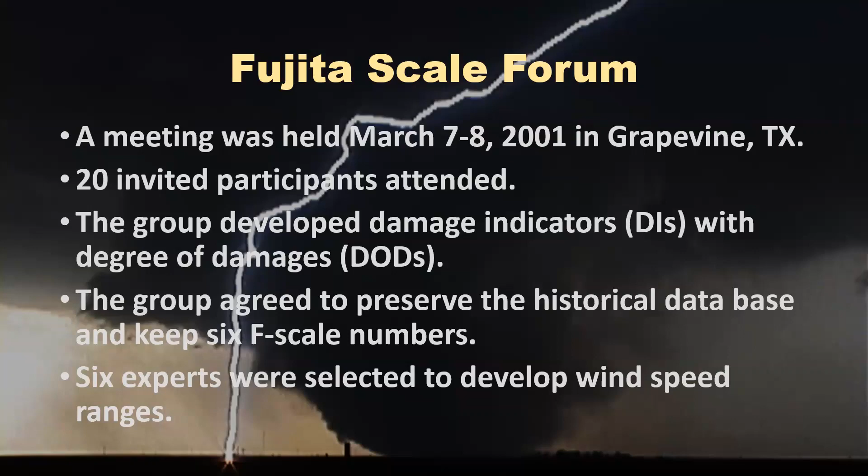So I think everybody's familiar with the EF scale. It has 28 damage indicators. In fact, we even have some trees on there. And this is still used today. But the updated version is going to go in here and really do a number on that. So in the new EF scale update, there's going to be 30 DIs. So there's going to be 2 more.

But within this table, there's going to be some combinations. We're going to combine them, and there's going to be some separations, and there's going to be some deletions of some of the DIs involved. Just to give you an idea, DI1 is small barns or farm outbuildings. That stays the same. DI2 is 1 or 2 family residences. That stays the same. And of course, residences are the vast majority of what we rate. However, number 3, the manufactured home single wide, is going to be combined together with the double wide.

And in place of 3, what we're going to have is the concrete masonry style homes that are typically in the southeast, like Florida. You don't see them as much around the Dallas-Fort Worth area, and you see them in the southwest as well. And then there's going to be a whole host of other changes that you'll see later on. Next slide.

So basically, each damage indicator has several degrees of damage, from 0 to total destruction, arranged in increasing order of severity. The DODs are a function of wind speed, so the failure wind speeds are a 3-second gust at 10 meters above the ground. Now, why that? It's because the standard anemometers in the country for most of our observations are 3-second gusts at 10 meters above the ground. 3 seconds is because of the response time of the anemometer. 10 meters is just the baseline out at airports and sites to record wind speeds.

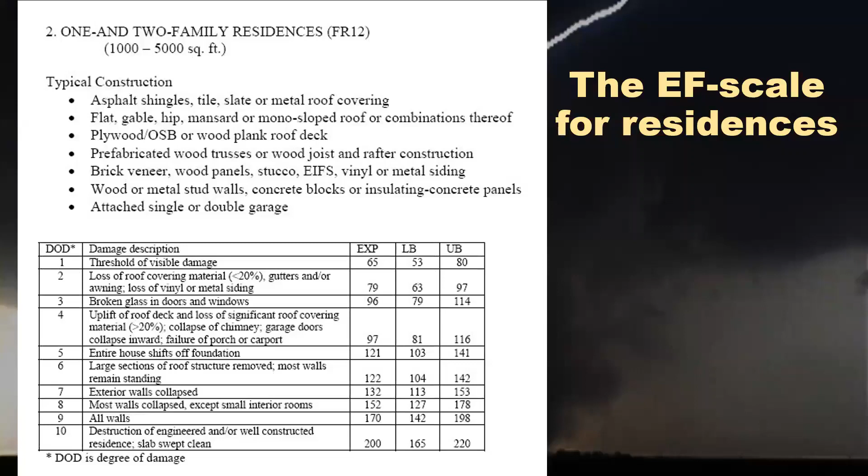Another problem is where the walls are attached to the foundation. Typically, you need to have every board as strong as each other in terms of where it's connected, but that isn't always the case. The weak link there is where the studs are attached to the bottom plates, and that's typically a straight nail connection. Works great for taking loads downward, but when it's reversed upward, doesn't do well at all. So that's why we have the ranges. Next slide.

So there's more description about the expected, upper bound and lower bound. So the key for the surveyor going out there is to recognize those critical anchors, braces, and connections that would have held the building together. So you have to know something about how buildings are supposed to be built in the first place. You have to know a little bit about the building code. It's typically a minimum for the center of the country, and a minimum would be a 90-mile-per-hour 3-second gust. That's typically what buildings are.

Now they call it a 115-mile-an-hour ultimate, which is not quite the same, but pretty close to the 90. It's just an averaging time difference. But that's what buildings are mostly constructed for, which doesn't sound like a lot when you think about it. 90 mile per hour, I mean, is that your goal? The odds of hitting that are pretty small. So we don't see buildings built very well to tornado winds. A 150-mile-an-hour tornado wind, even minus the debris, still wrecks most buildings. Next slide.

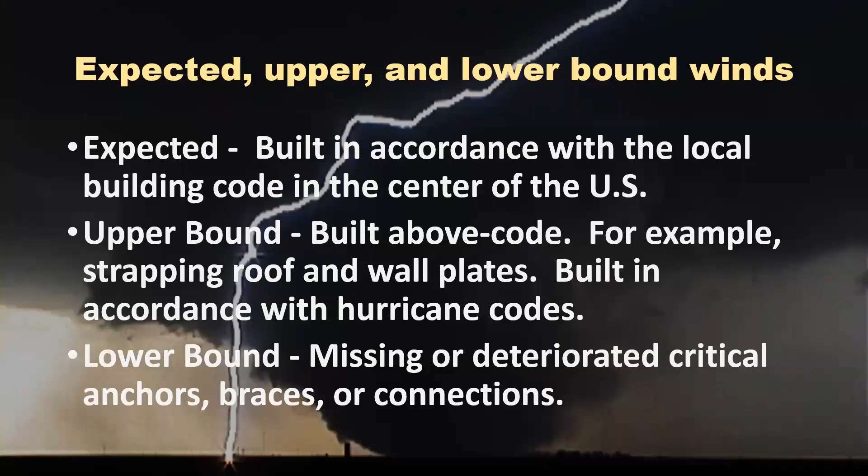So looking at the little differences here between the Fujita scale, converting to the 3-second gust, and then on to the EF scale. You see some differences there, especially as you go higher with the numbers, the 4s and 5s especially. It does not take a 300-mile-an-hour wind to destroy a house completely. And that is really one of the reasons why the engineers at Texas Tech, who I worked under, it's my alma mater, wanted to change this scale, because of overrating. And overrating a tornado's wind speeds makes for higher insurance rates and all that. If you could bring those down a little bit with some reason for doing it, then it's more closely aligned to what actually occurs. Next slide.

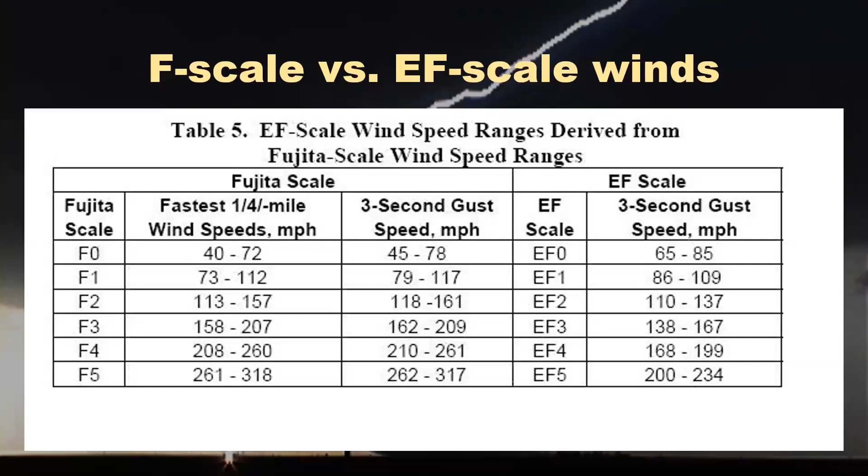So the EF scale still uses the concept of wind speed damage correlation. It's looking at the damage and then coming up with a relative wind speed to fail it, rather than just obtaining the winds from Mach 1 to Beaufort 12, which is what Fujita did to try to rationalize his F scale. His F scale was to fill the gap between those two scales, and he decided on 12 increments for some unknown reason, but that was how he could justify his scale. By the way, it was in 1971 when he developed his F scale, and it didn't become popular until the next decade, and it wasn't actually in peer-reviewed science literature until 1981.

So it took about 10 years for the Fujita scale to get into the science itself. But Fujita didn't want to wait that long, so he decided to publish his own SMRP papers in the 70s, which is his own personal stuff, because he was tired of the slow process to get a peer-reviewed paper. And not everybody agreed with the F scale initially, just like everybody doesn't agree with the EF scale.

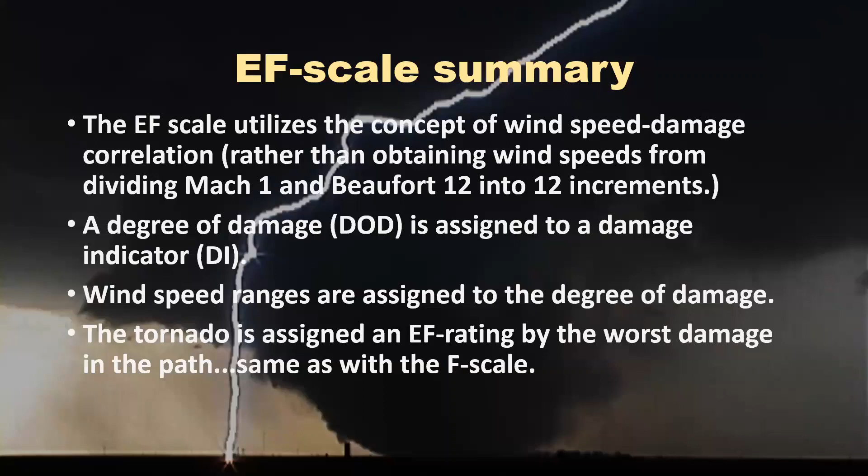So the wind speed ranges are assigned the degree of damages, and then the tornado is still assigned the worst rating based on the worst EF scale damage rating. Next slide.

So there's positive and negatives. Yes, it's subjective still, okay? But if you have a little bit of knowledge about what you're doing, maybe it'll be a little more accurate. Sometimes on the higher ends, you can be off one plus or minus on the EF scale. EF scale is applied to DIs, especially houses. Houses are the most common, of course, and it can be more complicated.

In fact, the updated version of the EF scale is going to be even much more complicated. So it's going to be up to the training and to modify the toolkit accordingly. EF scale has limited use. Canada has their own version. Japan has their own version. And then the European countries still have the F scale. They like that still. And the UK is a little different. They have the TORRO scale.

So more and more, though, we're getting input from our friends in Canada and Japan, as well as Europe, about how to make the EF scale here more universal, not just the US. Next slide.

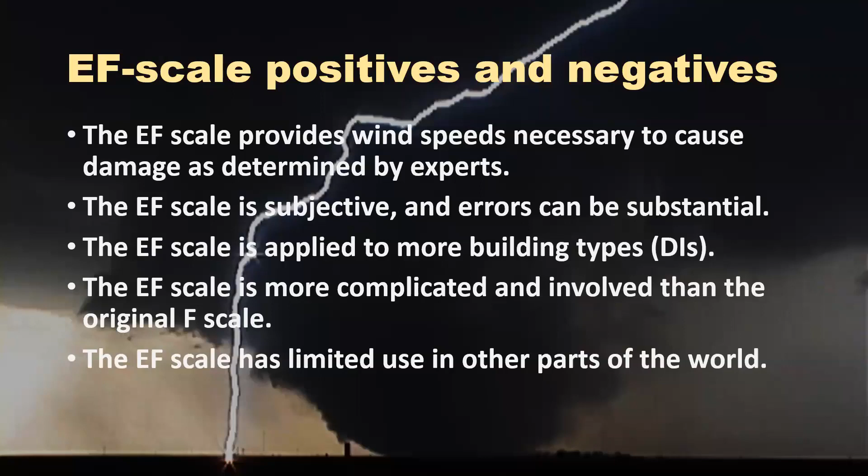So one of the big problems with the EF scale is to try to recognize those fatal flaws in the building construction and houses. Well, I'll just give you a little bit of background about what happens if you get a metal building? What do you look for there? And then how do you address tornadoes in open country? I mean, that's a real big problem, still is.

And for all those people who are figuring out risk, they want to know the intensity of a tornado in open country. The more accurate that you have that nailed down, the better off their models are going to be. And that's a tough thing. So some of the new DIs that are going to come up here are irrigation systems and grain bins. In some of the rural areas, we are going to have new DIs with these. Vegetation, can't do it yet. Road pavement, it's very subjective there, can't do it yet.

So how to incorporate these other building types in the future, and what we think about it is this EF scale is an open-ended scale. It's going to have another revision every 5 or 10 years. This is a work in progress.

However, this update process has been very taxing for me. I didn't have gray hair when I started, and now you see what happened.

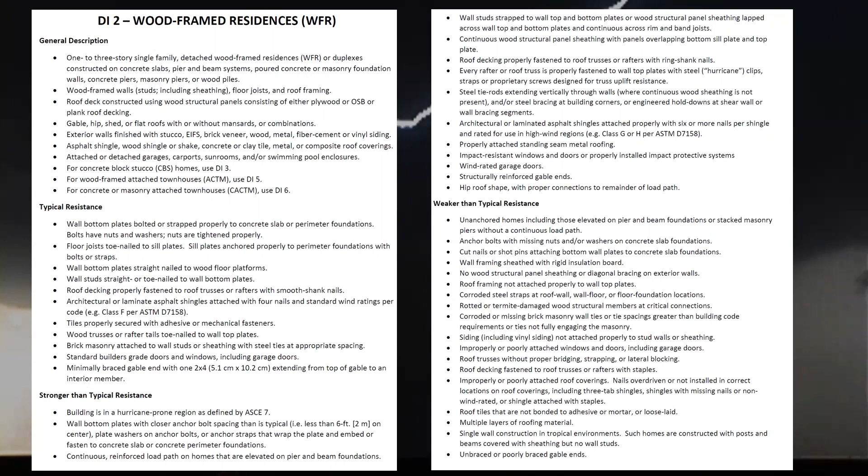All right, so if you remember, a few slides ago we had maybe 8 or 10 bullet points on residences. Look at the bullet points on the new EF scale for residences. It's massive, but then we divide it into typical resistance, stronger than typical resistance, and weaker than typical resistance. So those have been relabeled from expected, upper bound, or lower bound to these now. Next slide.

Remember the old table from the EF scale. This is the new one for wood frame residences. A lot more discussion, expanding this table with more descriptions. Also now, the building damage is going to be separated into 25% increments. That was my deal, to try to have an incremental amount of damage from roofs and walls, coverings and that.

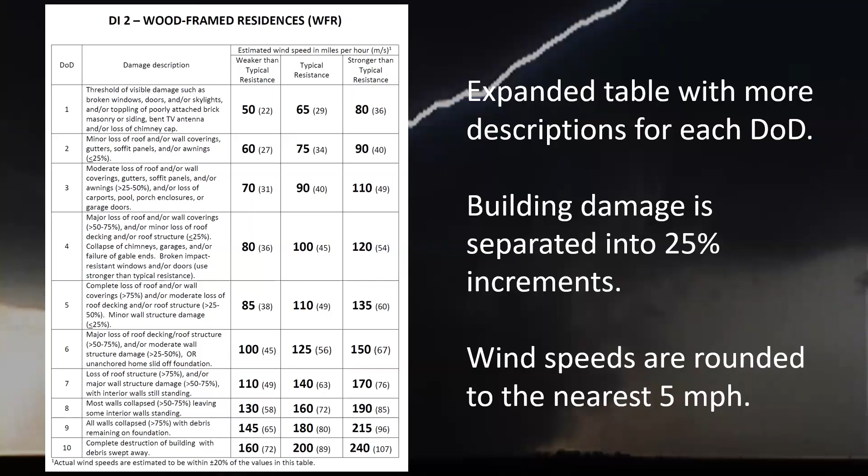And then instead of having single-digit wind speeds, because we're not that precise from the scientific standpoint, we're going to round to 5 miles per hour. Actually, there were some people that wanted to round to 10 miles an hour, but that's a little more coarse than the scale would allow. But right now, it's 5. Next slide.

Now, something new, a commentary. I have written most of these. These are very detailed descriptions, not only of the building itself, in this case residences, but then to go ahead and use the body of literature that's out there and reference it to get your numbers in line. I mean, just to come out with a bunch of numbers is one thing, but you have to justify it, right? This is going to be not only a scientific document, but it's actually going to be a standard. So you've got to have every reference vetted and justified.

If somebody went out and did a survey and rated a tornado a certain amount based on a certain level of damage, and they came up with a wind speed, well, we can use that in this case. So here, new photos. A lot of them come from my library. I've been on over 100 damage surveys. I have over 30,000 images. Granted, they're not as well organized as I wish they were, but we are using some of these in the new and improved EF scale. Next slide.

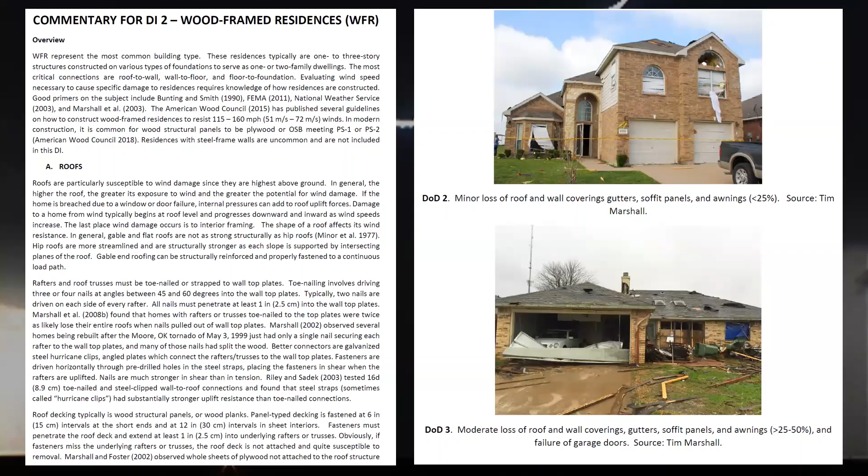So with the different levels of construction, I wanted to at least show you from the standpoint of wood frame residences how to recognize that. For the house on the left, that's your normal or typical construction where you have a wood frame home on a slab and this green board, which is like a cardboard insulated board that's used. And of course, it has no impact resistance, really. You can throw a board right through that stuff.

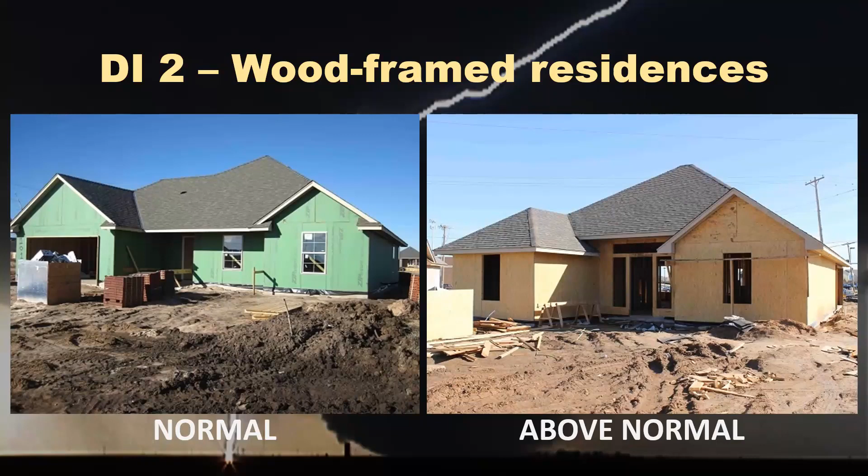On the right, above normal construction, this is in Moore, Oklahoma, where they have a stronger code now, and they're solidly sheathing homes, which is much better because that'll do a little better at resisting impact and missiles. And then that also locks in the frame where we have the roof-wall connection, where we have the wall bottom plate connection, and that locks it in as a box. So it's a stronger home. So that's how to kind of tell the difference between something that's just typical on the left and something that's a little better built on the right. Next slide.

So looking at the current ASCE wind load map, this is the way it works. For the vast majority of the country, it's 115 ultimate, which is at the very, very top, which is about a 90 mile per hour, 3-second gust. That's still about what it is. But you'll notice a lot more lines along the coast. Why is that? Well, that's the hurricane zones.

So just because a house is built in the hurricane zone, it should conform to a higher standard. That's not always the case. And to assume that it's built better is not a good assumption. You see a lot of buildings built a long time ago and they didn't have good construction techniques. And this came to a head back in 2002 with the La Plata, Maryland tornado, because they had houses that were completely wiped and they were going to rate them 5. And it's like, well, let's take a look at how they're built. And they were built just as poorly as houses anywhere else. And so they had to come on down. So to me, they weren't more than a 3. And that ended up to be somewhat controversial there.

And it's because you think that in a hurricane-prone area, you'd have a better house, but that's not always the case. And we found that out also in Andrew. There's a couple subdivisions there where houses were obliterated. Wood-framed houses obliterated by Andrew. Yes, it's partly due to the wind, but also partly due to the poor construction. I mean, there were houses that did fine after Andrew. The same for Charley. Next slide.

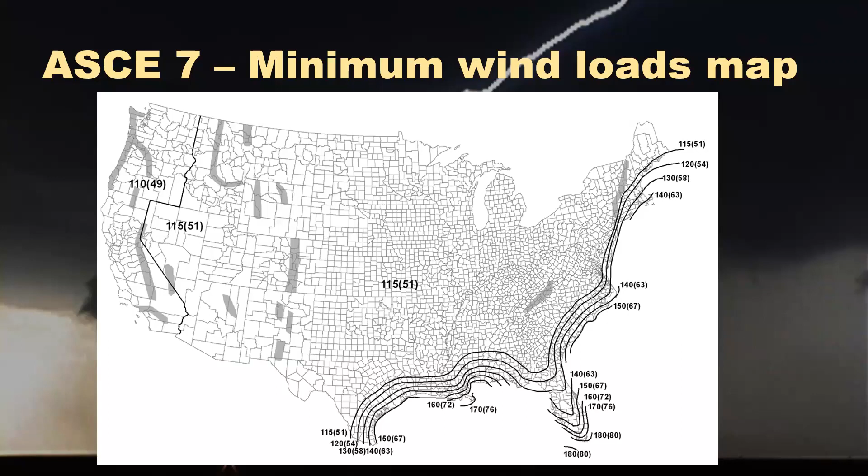So a little bit of the construction here: on the left is normal construction, where you would have a bolt every 6 feet. No plate should have 1 bolt. They should have a minimum of 2. You need to have a bolt within a foot of the corner. And then that's in red here. And then we have the toenail, or actually the straight nail from the wall stud to the bottom plate. And that's where the failures usually occur there.

Below normal is when you use shot pins to shoot down the plate into the slab, and it's with a gun, actually. You load a pin in and you shoot it through. And part of the problem is when you're dealing with a house in this detail, you're dealing with 2 trades. You're dealing with the framer and you're dealing with the person who pours the foundation. Those are 2 totally different trades. They don't talk to each other. So you think, well, the guy who pours the foundation should put in the anchor bolts. Well, they don't know where the walls are going to go.

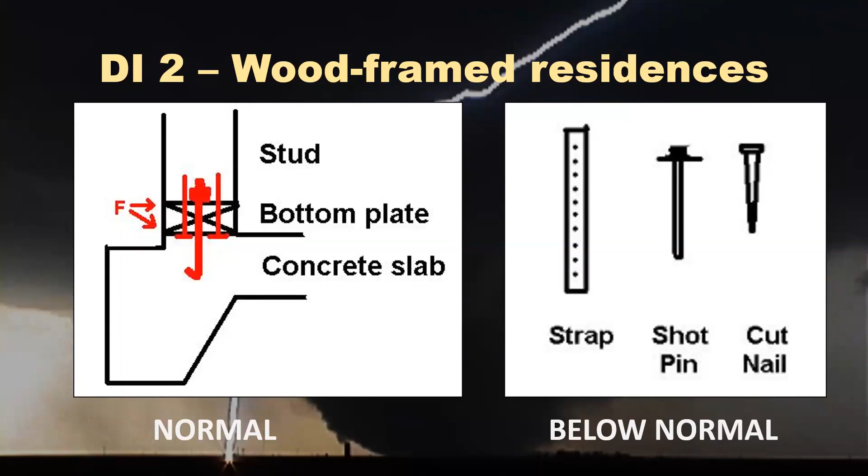And when they do that, I saw bolts in doorways. They didn't know. They just stick bolts down, and now they're in a doorway. What do you do? You got to cut the bolt off. So that's a real problem with different trades having to do this, but it's very important to have them talk to each other. And maybe have a set of construction plans, but most houses don't have that detail. Next slide.

So on the left, normal construction, toenail stud, and then a shot pin with a square washer, versus on the right. Look at the difference. This is an SP connector from Simpson Strong-Tie. It grabs the stud, so it's not able to wobble back and forth. And the nails or screws are in sideways. That's a very strong connection.

Versus on the left, you can pull that out very easily, maybe 100 pounds. On the right, to pull that out, about 1,100 to 1,500 pounds. 10 times the resistance, just between that and that. Amazing difference. And then, of course, the bolt, that's standard issue, but that bolt has got to be in the middle of the plate.

A lot of people don't do that. They put it on the edge of the plate, or they cut a notch in the plate. And then it has to have a nut and a washer. Now, I know that seems like really simple stuff, right? You have to have a nut and a washer. You just can't have a bolt. But I have seen thousands of homes without the nut and the washer.

There's the bolt, but there's no nut or washer. It doesn't make any sense. And, of course, the code doesn't detail it. It just says put bolts every 6 feet. And it's like, well, where does it say in the code to put a nut and a washer on the bolt? It doesn't. That's just supposed to be common sense. When you go to one of the hardware stores and you pick up an anchor bolt, guess what? It has 3 pieces to it: the nut, the washer, and the bolt. Why leave the nut and the washer off?

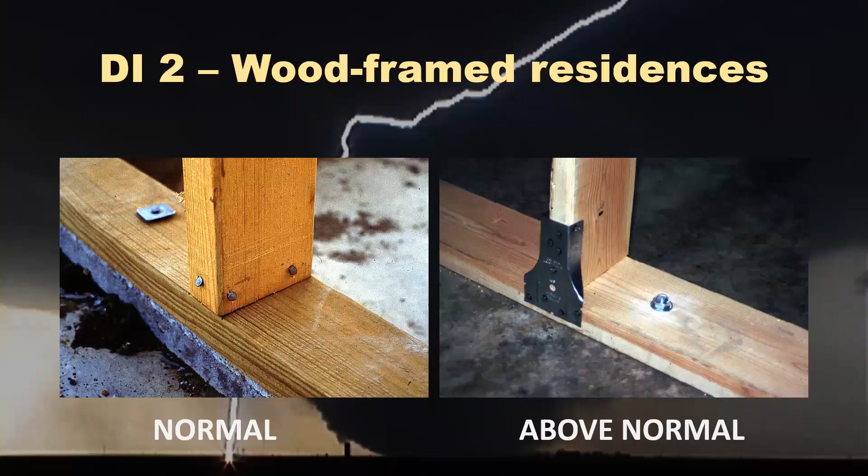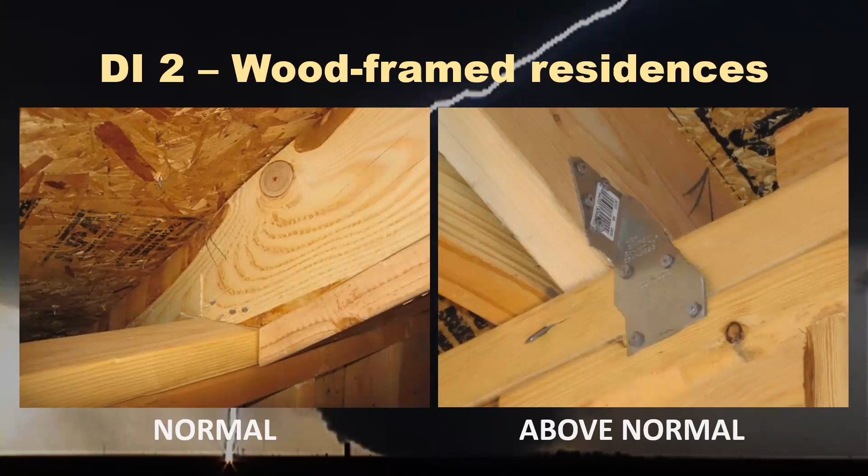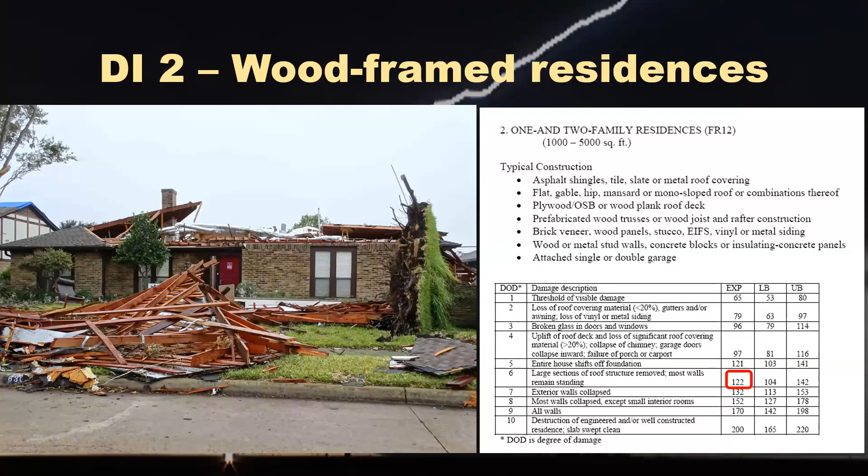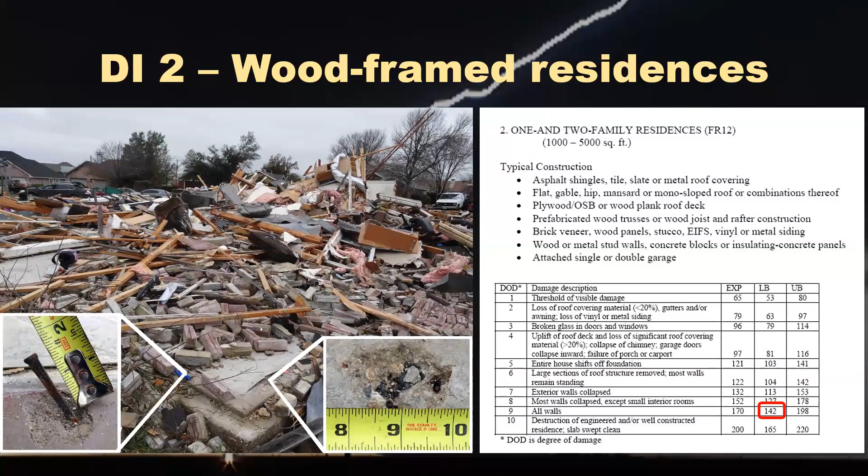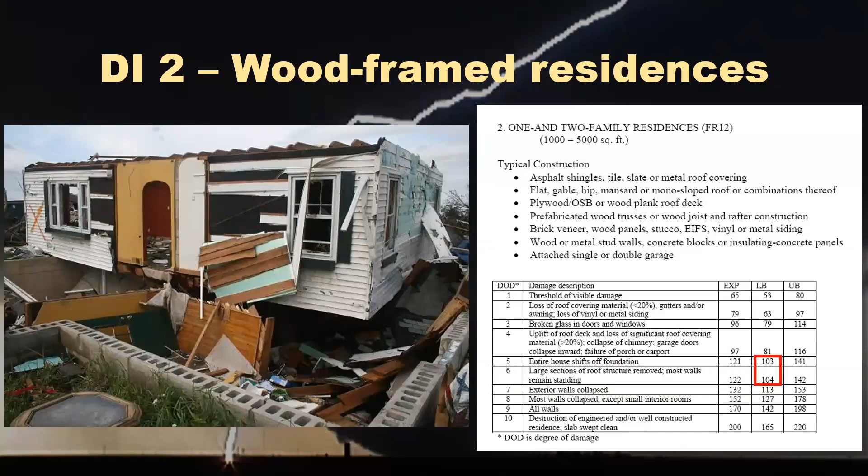And of course, manufactured homes. We have to deal with these, and unfortunately, the manufacturers of the homes don't install the anchors. That's a third party. I have gone through some of the plants here in Fort Worth. They build those homes very well. Those boxes are very well done. However, they're not responsible for anchoring. Well, you got to have a good anchor. You really do, in order to keep them there.

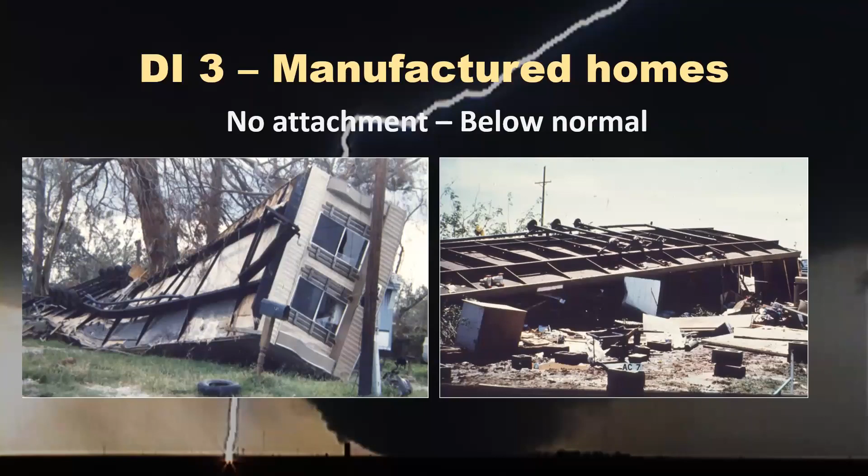Otherwise, they do this. They just simply roll right over. Look, going to the left, there's a mailbox still there. There's a power pole there. Trees still there. Going on the right, you can see power line in the background still there. Just rolled over. The tires were taken off when they installed it. Very low winds to do this. Next slide.

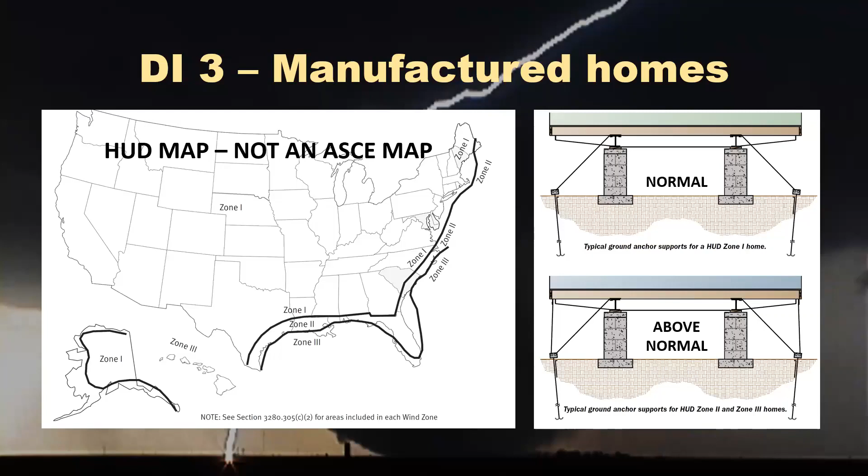And then, of course, how deep you go with your attachment depends on your soil conditions. How many anchors do you use? Also depends on your soil conditions. This is not an easy thing to do. And yeah, they have zone 3 in the hurricane-prone zones. So that's really asking for trouble. Next slide.

That's the stabilizing plate. A lot of times we don't see the plate being used, or the straps that are used are all corroded. It takes about 10 years to corrode them. And so what you think is an anchored home, 10 years later is not. Next slide.

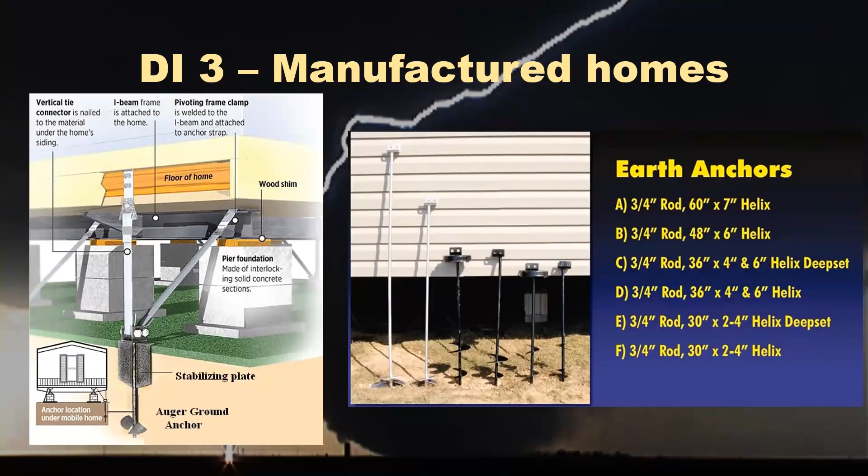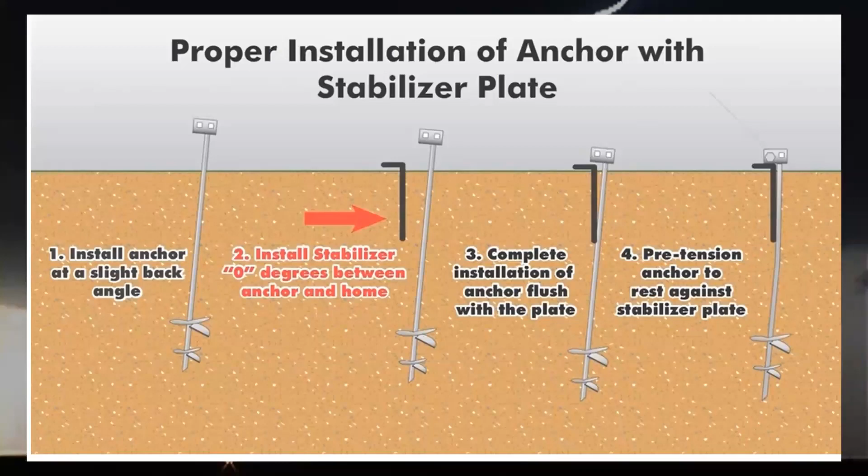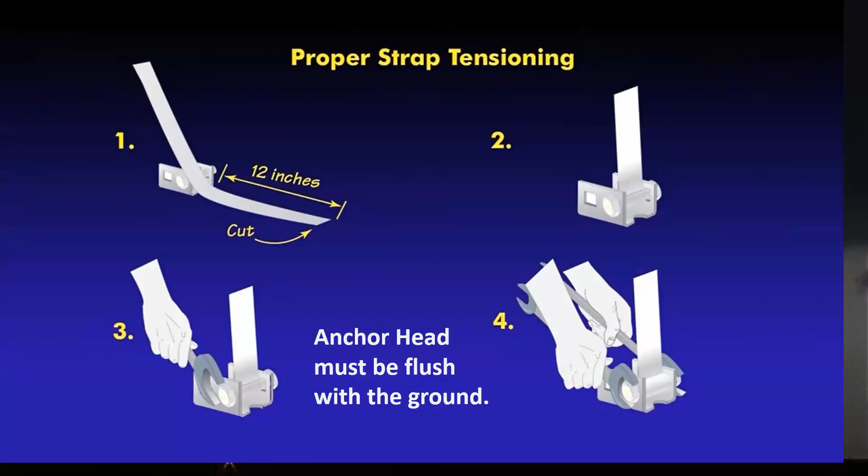So here I'm in Picher, Oklahoma, and I'm going through this manufactured home park, and lo and behold, lots of devastation, destroyed trees, destroyed manufactured homes, and then I see something dangling up there. What in the world is that? That is a different kind of anchor. It's a rock anchor. It's only for rock soil, rocky terrain. But this was an area of soft soil. So, wrong anchor. Next slide.

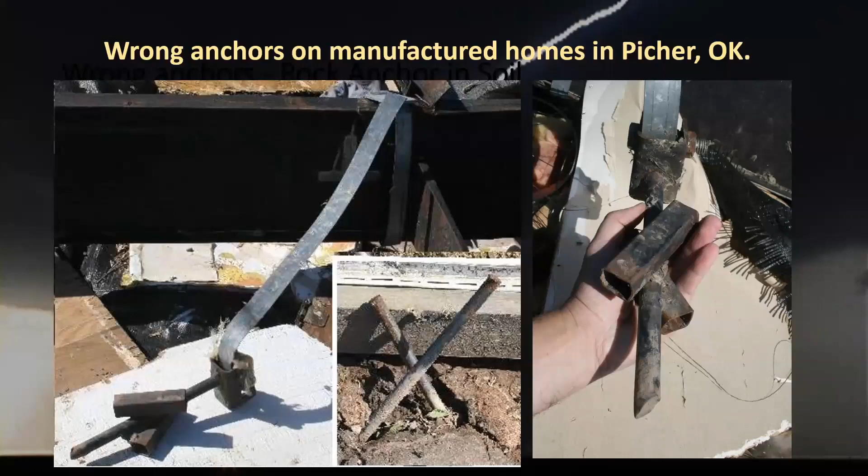Here I'm holding it in the palm of my hand on the right, and all it is is two tubular steel tubes there with a rod, and then you just do the old cross rods into it. Now that's good for rock, but it doesn't do very well for soft soil. It pulls right out, obviously, and it did. So that wasn't much of an anchor. Wrong anchor, not anchored. Next slide.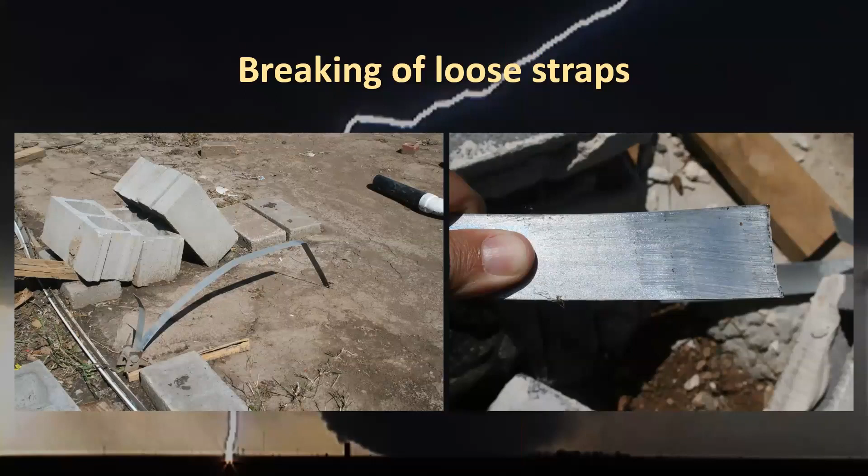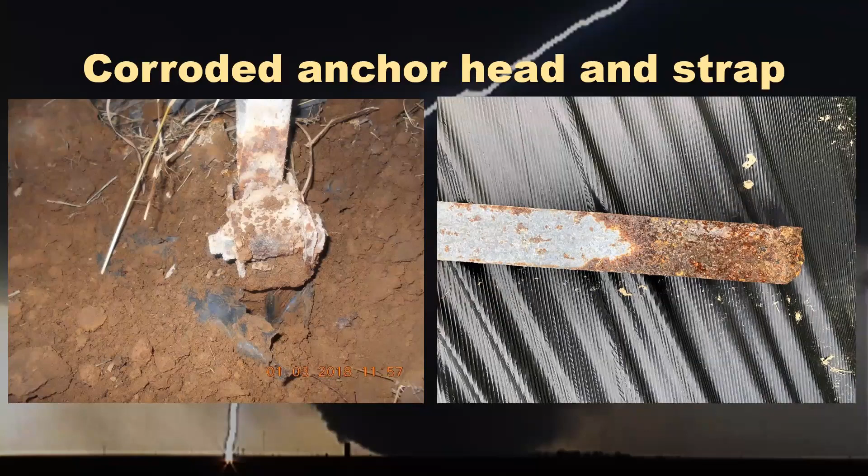Breaking of straps. You can see on the right where it actually was tugging a little bit on the strap and it finally broke. Anchor held. Next slide. And then corrosion. That would fall into a lower bound then because it's corroded. Next slide.

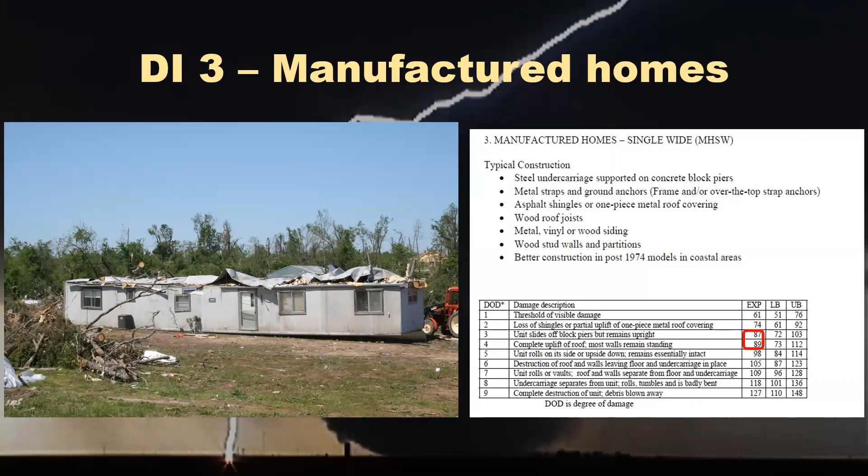So we get back to our EF scale, the original one. We have a manufactured home that slid off its blocks. It's also got roof damage. There's our DODs. Where do we go from there? Next slide. All right, so here, this house had been attached properly, but has a complete uplift of the roof. So expected wind speeds about 87, 89 miles an hour. Next slide.

Here we have a large isolated retail building. We've got some of these around the Dallas area that have been hit. The one on the left, I think could be Dallas, right? On the right? Yeah, left and right, Dallas area. Seen a number of these buildings get hit.

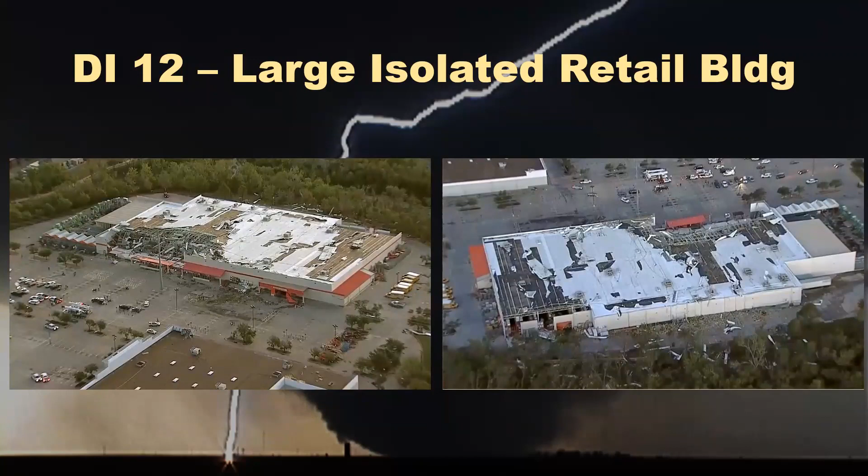These are precast tilt wall panels with steel trusses for a roof system, and then the decking acts as a diaphragm to hold everything together. So you want to keep the roof decking. If you lose the roof decking, then you lose the top end support of the wall, and the wall panels can fall in or out. Next one. And that's what happened. We lost the diaphragm here, and it buckled in. So here with the large isolated retail building, looking at our original EF scale. Next slide.

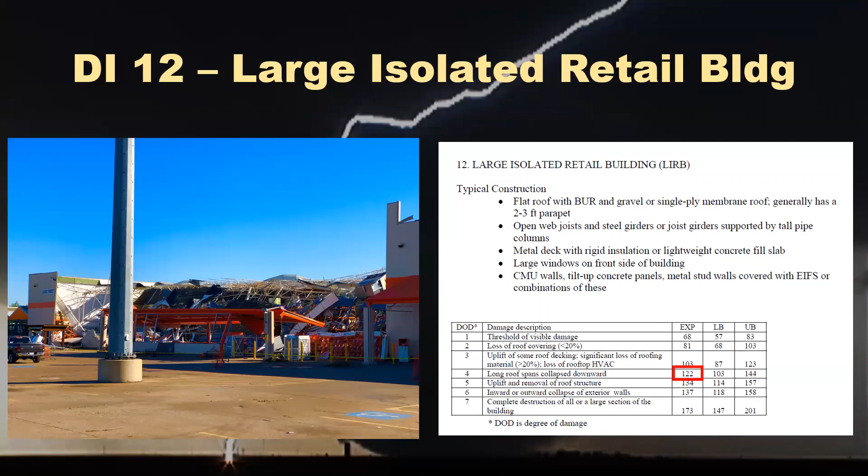There we are. DOD 4, long roof spans collapsed downward, 122. But we also have next to it an ETL, or a transmission line that's staying up. So we could use that as an upper bound. So something that doesn't fail can be just as important as something that fails. Next slide.

This was the one, I believe, in Joplin that I looked at. All wall panels except for the extreme bottom right were down. Complete loss of the roof diaphragm. There was some toppling of stacks. There were fatalities in here on this building, but it was pretty much on the right edge of the Joplin tornado. Next slide. See where that's at. Complete destruction of the building, DOD 7. So it's about 173 miles an hour. Next slide.

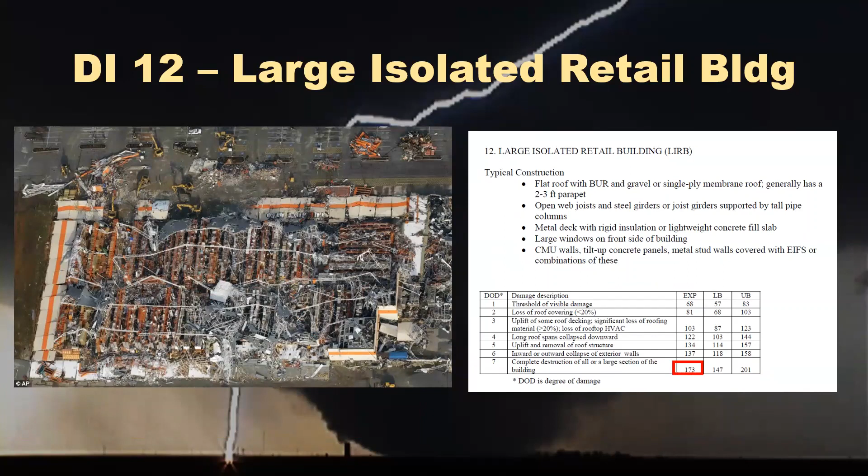Elementary school. This one's down in Glen Heights here. There was very little damage around the area from this tornado, but then all of a sudden I saw these wall panels out, and I went ahead and looked at them, and they were not connected to the structure. They were freestanding wall panels. And then, to make matters even worse, the attachment of the wall to the foundation was nails, no bolts. And this is in Glen Heights, suburb of Dallas.

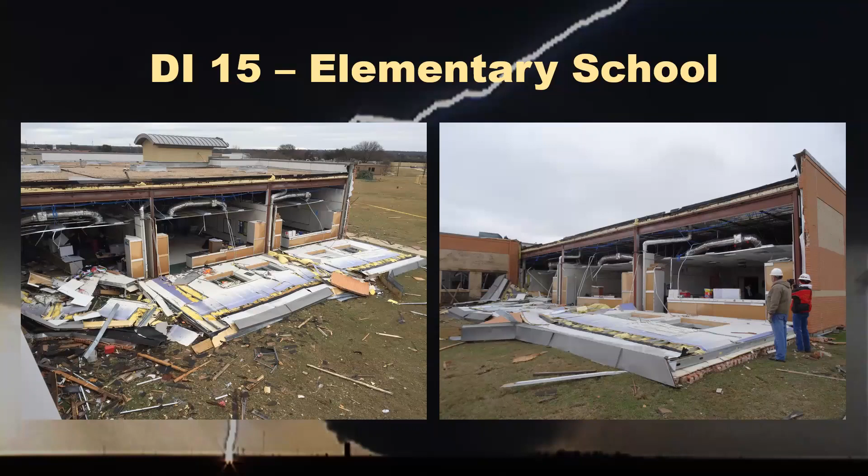So I made mention of this. The Dallas Morning News got a hold of this, and they ran with it. And boy, did I get flack for this. I'm telling you, I got so much negative press for this thing. And then the school wanted to hire me as a consultant, and I said no. And I gave it to a friend of mine who's not my friend anymore. But yeah, it's just like I didn't want any part of this.

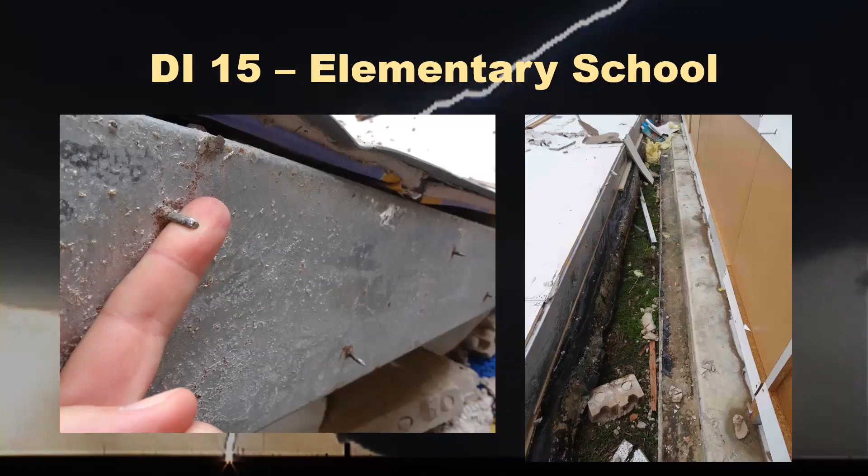This was really amazing. And it turns out that the company that built this school built 19 other schools in the Dallas area. And when they checked them out, they found the same kind of problems with those schools as well. So this was just scratching the surface of a bigger problem here. But as an engineer, I have to say something, you know? And I did, and it just lit a firestorm. Next slide. And there's your little divot there.

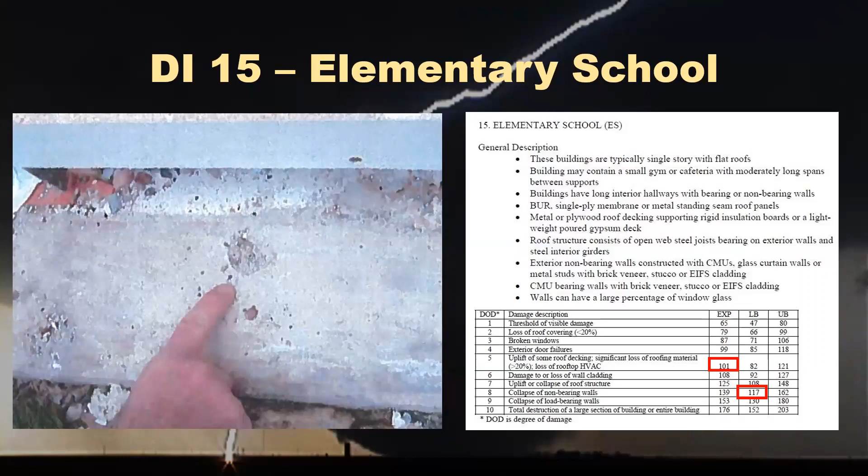And then a little more severe damage to a school here in Dallas, the Dallas tornado. This is an older school, kind of the one I went to. You know, these older schools, they have this kind of array of windows. You lose that array of windows, and then it lets internal pressure come in and lift off part of the roof, and that's what happened here. However, whoever designed those basketball backstops deserves a medal, because that went through. We don't have an EF scale for basketball backstops. Okay? But man, that did pretty good. I mean, not bad at all. Next slide.

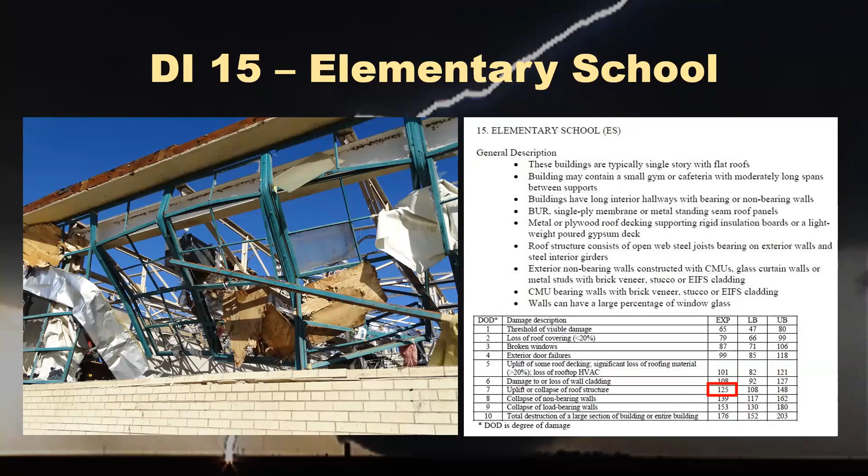So here we have the window array pushed in. You can actually see where the failure happened. And then the wind got in and removed the roof panels. Next slide. But this is typical construction, so we can't fault them too much. We have the uplift or collapse of the roof structure is 125 or lower. I do believe it probably was a lower wind speed than that. But that gives you an idea, especially in light of the fact that we have the basketball backstops there. They're just sitting there fine, ready for the game. Next slide.

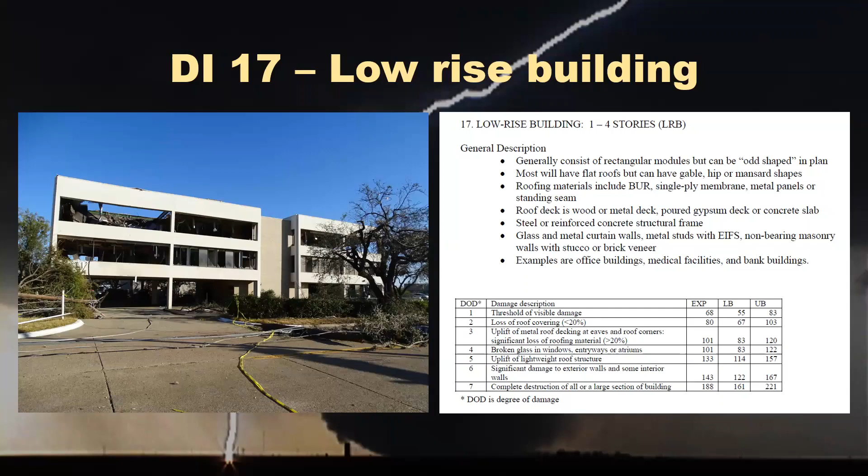Here's an office building in Dallas, right on Stemmons, actually over on Central, and it had a large window array, blew in, blew off the roof. Next slide. So here we have a DOD 5, uplift collapse of the roof structure, 133. Next slide.

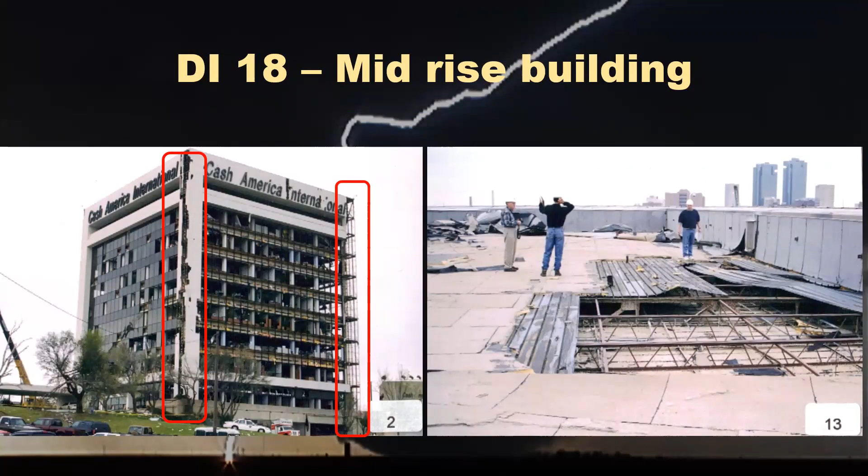And of course, going back to my older days with the Fort Worth tornado, we have the Cash America building here, which had a large amount of glass that was removed, and the facade, which was circled here. They had travertine tile on the corners. And wait till you see how they were attached to the building. You'll get a kick out of that, and they did lose some of the roof. Next slide. They were actually twisty tied on with a slop of mortar in the back of the stone, and then they twisty tied them on the rebar.

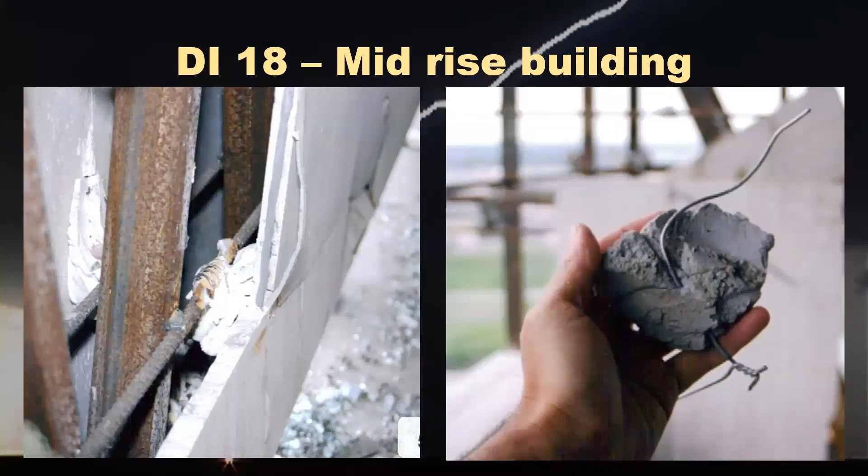So there on the left, you can see the little twisty tie, and on the right, I'm holding the glob of mortar with the twisty tie there, and that's how your travertine stone was attached here on that building. Next slide. All right, so mid-rise building. Next slide. That would be in the 129 to 136 with the curtain walls being broken and partial uplift of the roof. 129 to 136.

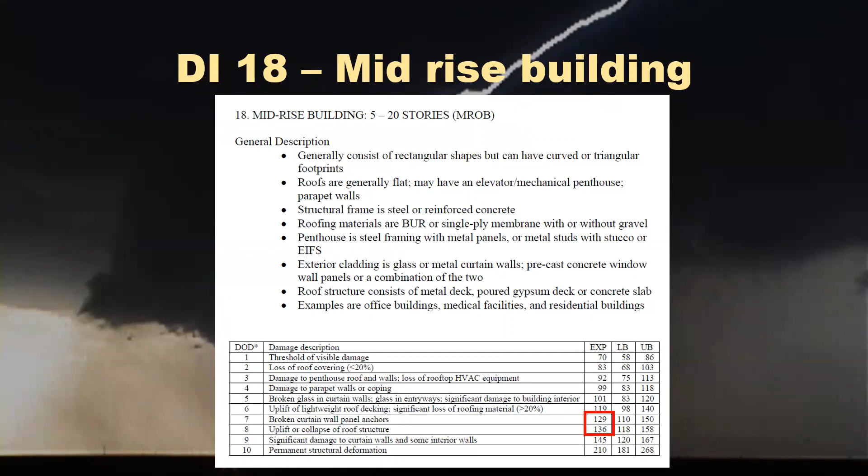Next slide. And of course, our high-rise building. This was a beaut. I was going up and I was taking a look at this building, and all of a sudden a piece of glass came out and hit the ground near me, and it was like an explosion. You certainly don't want to be hit by any falling glass from this. This is downtown Fort Worth, 2000 tornado.

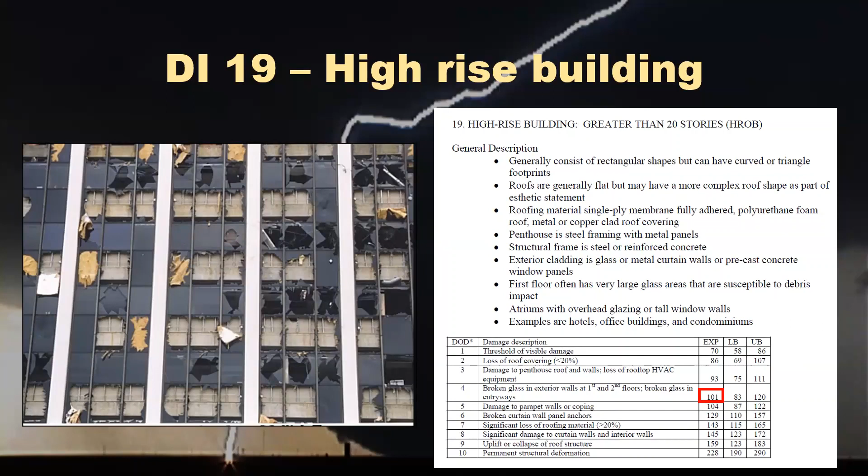Next slide. Metal building system, an entirely metal system. But look at how corroded this was. This was, I think, in Lake Charles. The salt environment down there, it just eats this stuff. This is a stud on the right, near the foundation. It wasn't even connected. The wall was just hanging by the panels. It was eaten up at the bottom so much. So, Hurricane Laura made easy work of that.

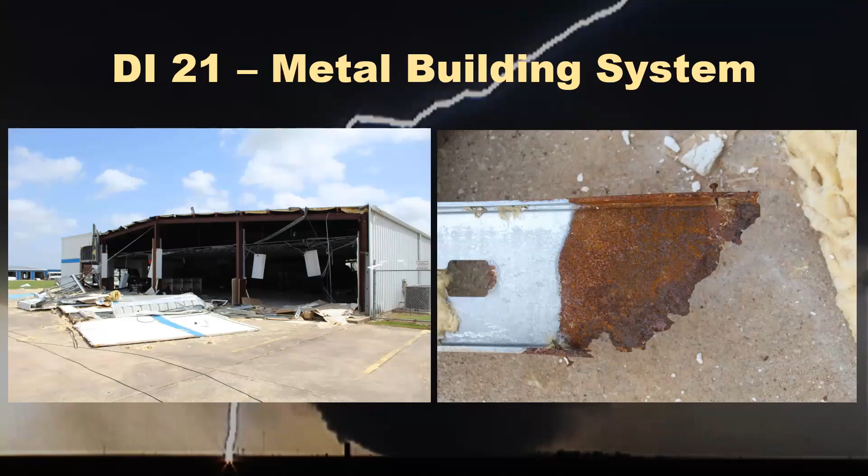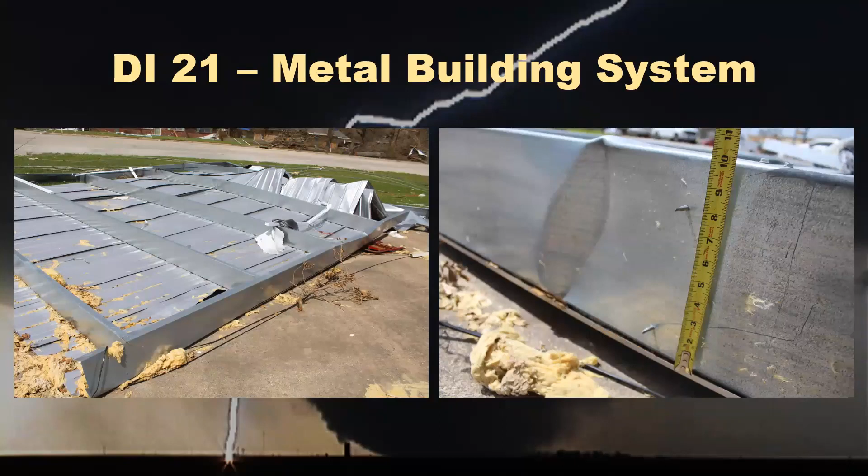Next slide. And here's the wall panel with the bottom on the right there. Little nails again. Yes, it was nailed. Next slide. That's it. That's all you get. Actually, it was a screw. So, next slide. And there's 78 miles an hour.

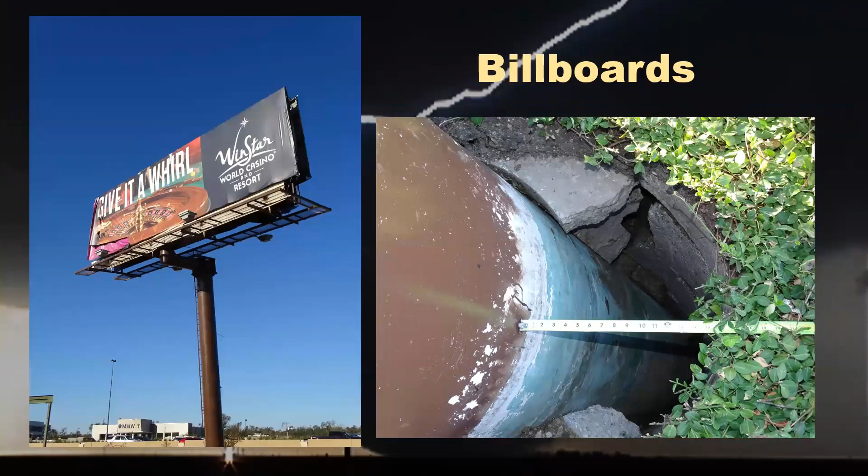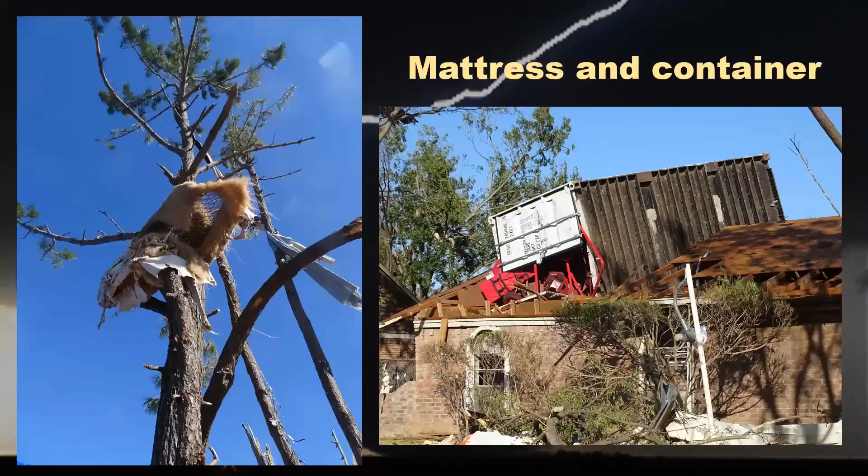And there's some neat things that we continue to see, but we have no EF scale for: a mattress in the tree on the left and the boxcar on the roof on the right. That boxcar was filled with school supplies, desks, and furniture, and it was actually lofted, went almost a half a mile. Next slide.

So anyways, this just kind of gives you a little bit of idea of where we've been and where we're going to go with this. Like I said, the EF scale is still a work in progress. And it will be a couple of years out before we have the final document out there. There will be a public viewing of it in about a year or so, so watch out for that. There'll be statements out there that you can take a look at. But anyways, that's where we're at.

I brought a couple papers in for the office. If you're interested in any of these papers, kind of indicating where we're at, just email me. I've got my business cards there. And I'll send you a PDF copy of those papers. You have it in your digital file. So thank you for the invite. Appreciate that. Thank you.

I know we're running up to the top of the hour here, so we can probably take one or two real quick questions, either here in the room or online. We'll take them here in the room. All right. Yeah. Great.

Tim, I've noticed that you've gone to some of the ratings of some of the tornadoes the last 2-3 years, and a lot of people are saying that should have been an EF5, and you've alluded to seeing some things that you are inclined to think that maybe you were there at a 5 level, but then the official rating comes out as a 4.